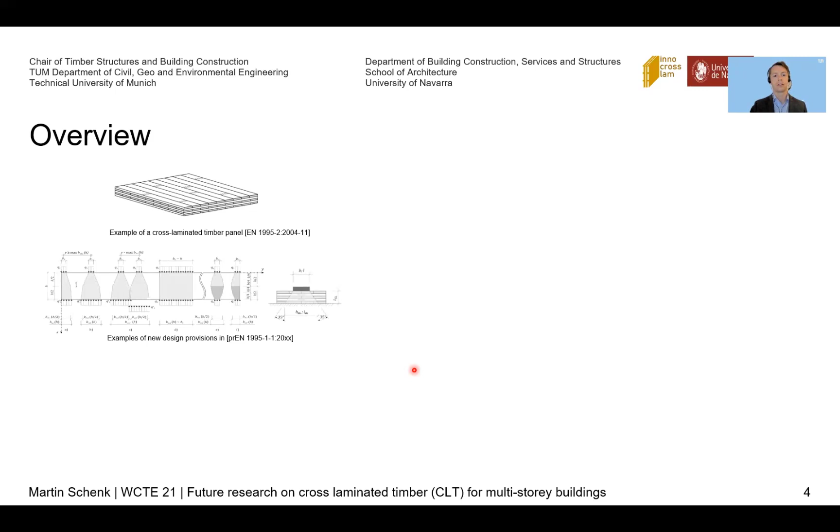The background of the study is very clear. The rather young material cross-laminated timber hardly made its way into the European design standards of the first generation, the Eurocodes. Those documents developed in the early beginning of the century got now revised towards the second generation, and CLT will be profoundly integrated. But the question remains, will this cover the majority of the design situations that we find every day on site?

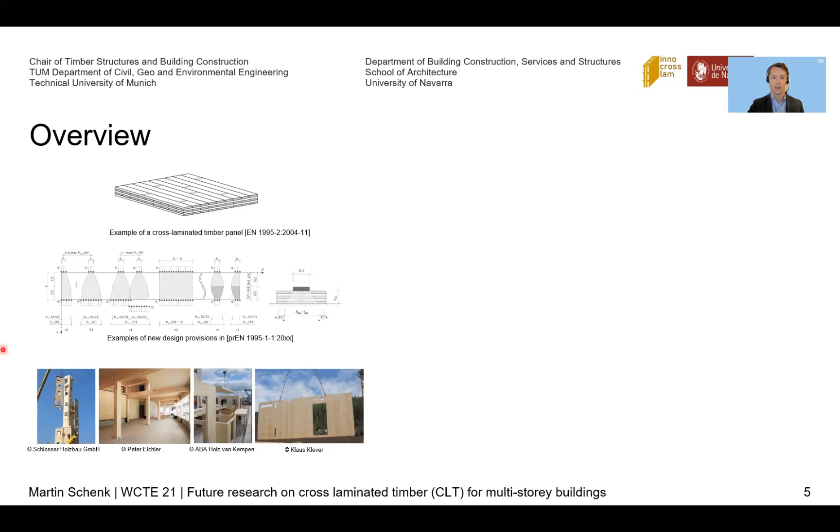To investigate this, we distributed a digital questionnaire on cross-laminated timber design worldwide to those practitioners which might process or install CLT. This means structural engineers, suppliers and manufacturers, and research institutions. We asked altogether 48 questions on the experience of our participants on CLT constructions, their general design methods, finite element software, and complex design situations.

Where do our participants see challenges, problems, and possible improvements? Beyond that, we ask more detailed questions on joints and connections and seismic design.

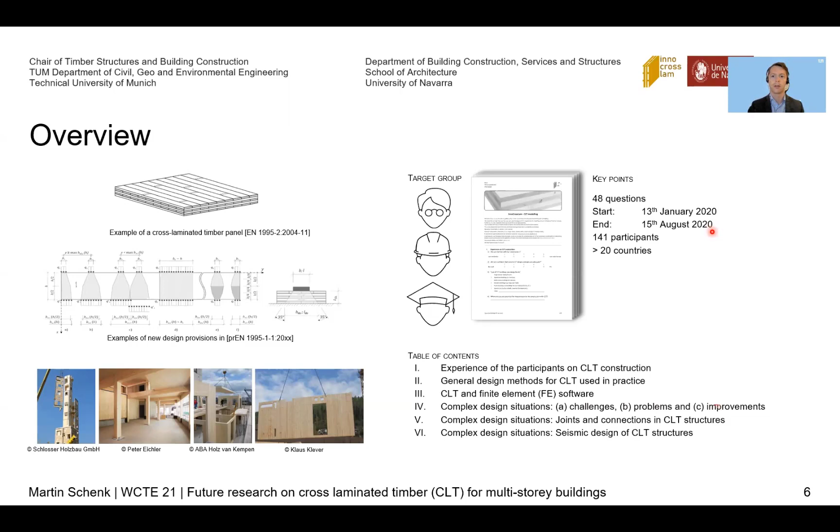We started the study in January 2020, and on the cutoff date in August 2020, we received feedback from 141 participants from over 20 countries. Most of the feedback came from countries like Spain, Germany, and Austria, but we also received some replies from experts from countries like Canada, New Zealand, and Australia.

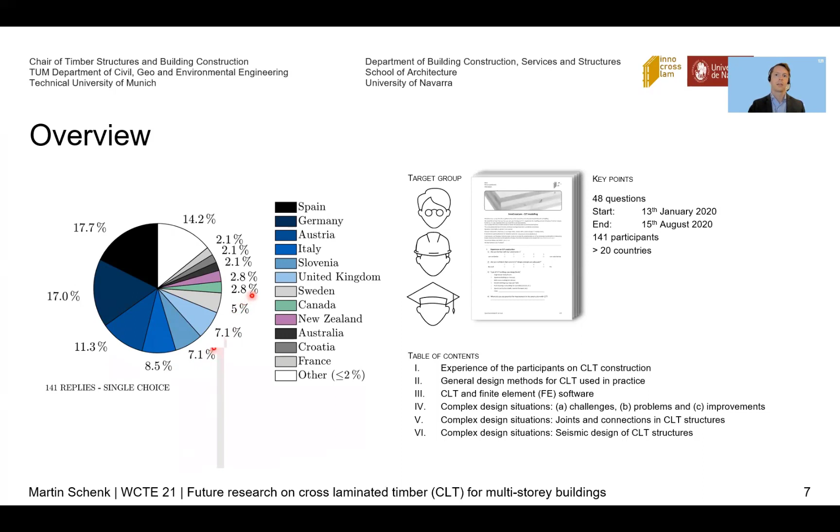Now let's deep dive into the experience of our participants on CLT constructions. The group of respondents consisted mainly of structural engineers and design companies with more than 10 years working experience.

Most of the companies have more than 30 employees, and they work mainly in the timber sector. To wrap this short numbers quickly up, the present data suggest an in-deep experience of our respondents and a suitable working environment for our study.

The majority of our respondents seems to be in, let's say, close contact with CLT. Nevertheless, even though the participating companies are working in the timber sector or are very active in the timber sector, CLT takes only a small percentage in the overall order volume of those companies.

This suggests or this indicates a huge market potential for CLT, not only in comparison to other materials, but also within the timber sector. Single double family houses, apartment buildings, and multi-story buildings higher than 4 stories are that type of constructions where CLT seems to be used most.

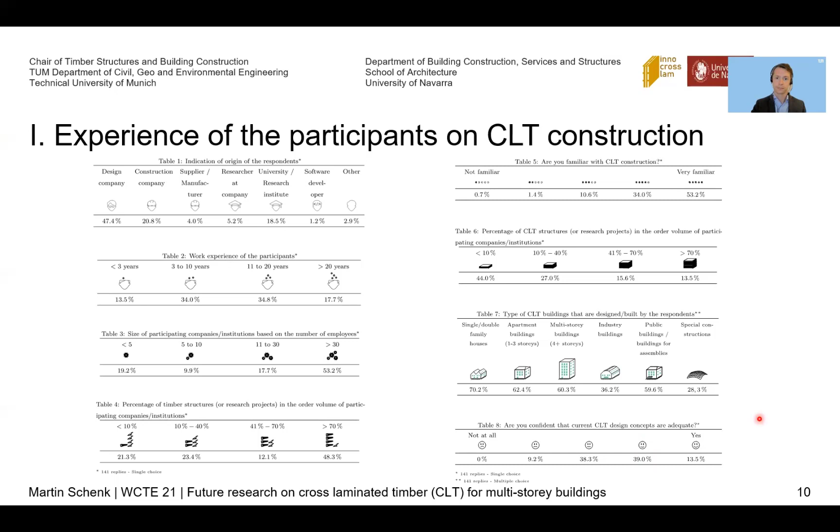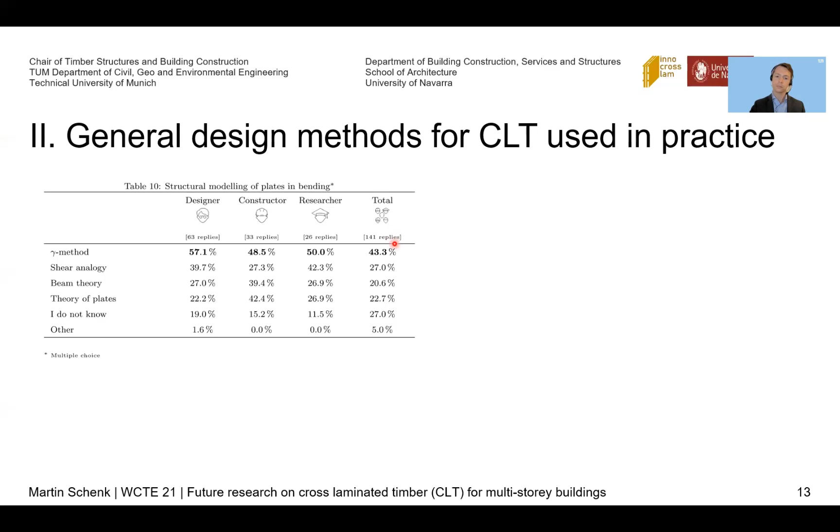With 15 to 20% rather high seems the share of respondents who do not know how the layering is considered. This impression is supported by the lower number of participants who apply homogeneous cross-sections into their modeling in comparison to those who process with the gamma method. Both values should be at least equal.

When asking about the implementation of torsional stiffness into the models, only one third of respondents indicated an absolute number. And finally, asking about the applied Poisson's ratio, 45% of participants responded that they do not know which value is used.

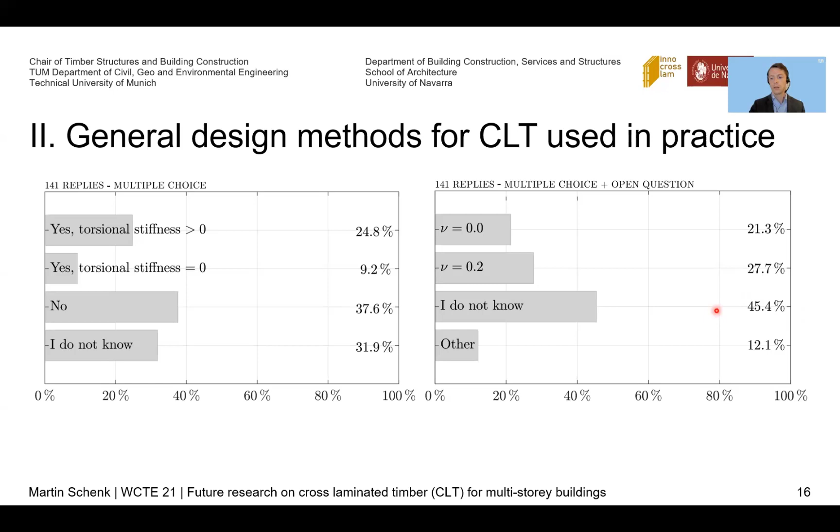The investigation showed as well that the satisfaction with those tools is rather high. And of course, the highest satisfaction is with those solutions that the engineers developed themselves.

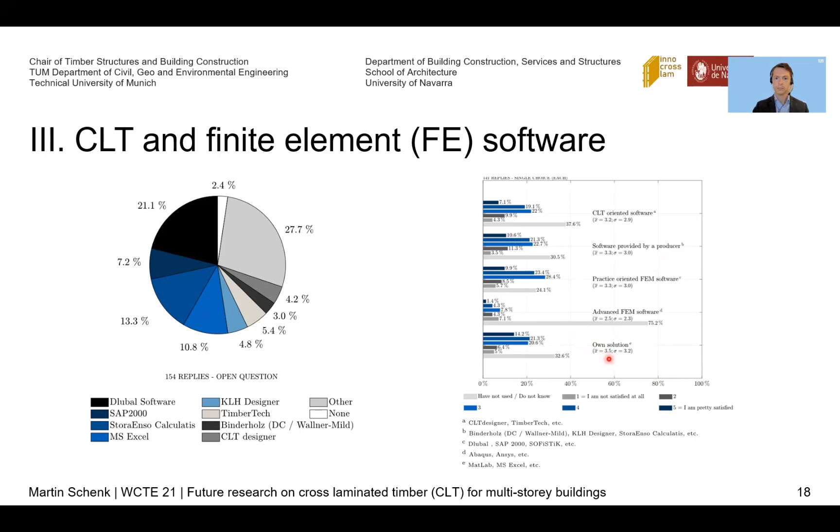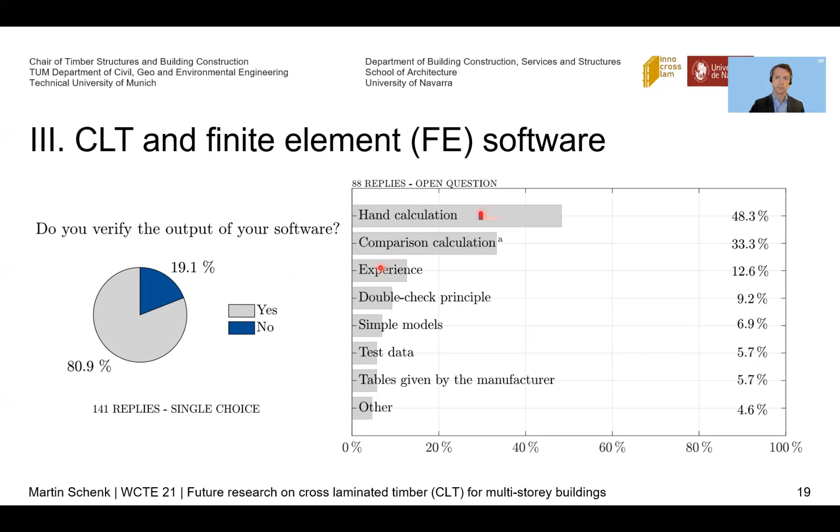We also asked if results given by software are verified. Almost 20% of our engineers do not verify software output, which seems to me personally frightening. When verifications are done, then mostly by hand calculations, comparison calculations in different software, or by experience. But of course, sometimes comparison is not so easy.

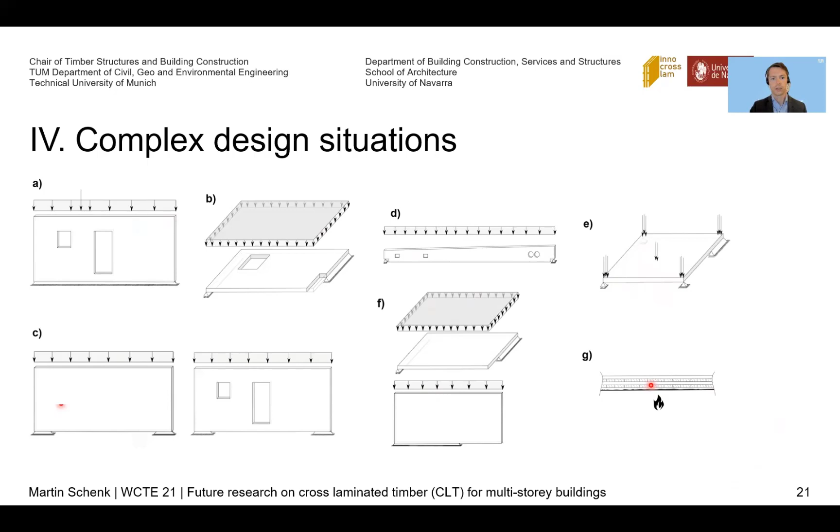Within these examples, the participants indicated concentrated loads and openings in walls and floors as the most challenging. Further on, it was clearly stated as explanation that design concepts and guidelines for those constellations are missing or incomplete.

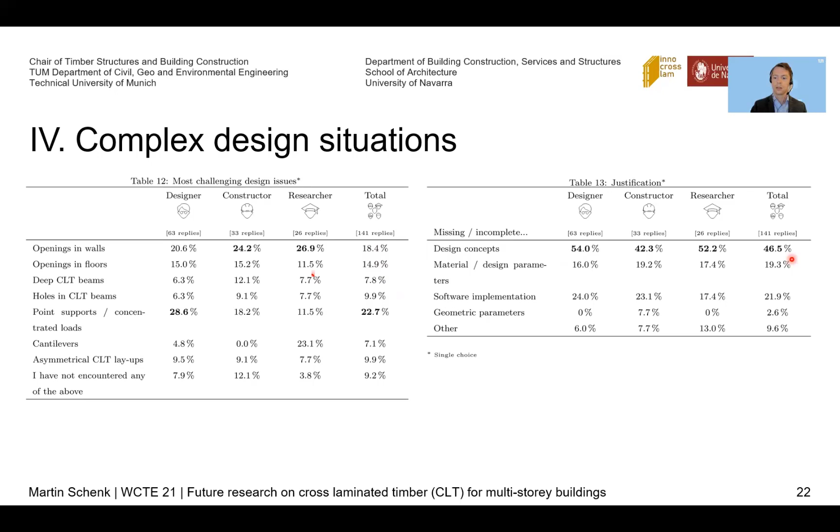We also asked participants to provide other challenging design situations. As you can see, joints, connections, vibrations, and fire design have been answered relatively often. Other mentioned categories were durability or execution rules. And again, the justification for naming them was missing or incomplete design guidelines.

Since we identified joints and connections prior to the distribution as a potential issue, we asked some more detailed questions. One was about the modeling of those connections. Independent of where a connection is applied within a structure—whether within a floor, within a wall, or between a floor and a wall—engineers active in practice are mostly used to modeling them as springs. But when it comes to the absolute numbers of those stiffnesses, a bandwidth cannot be given.

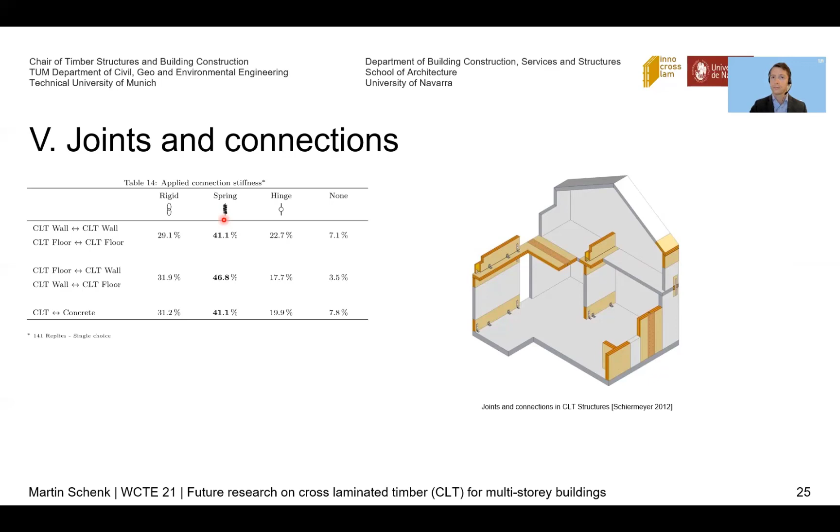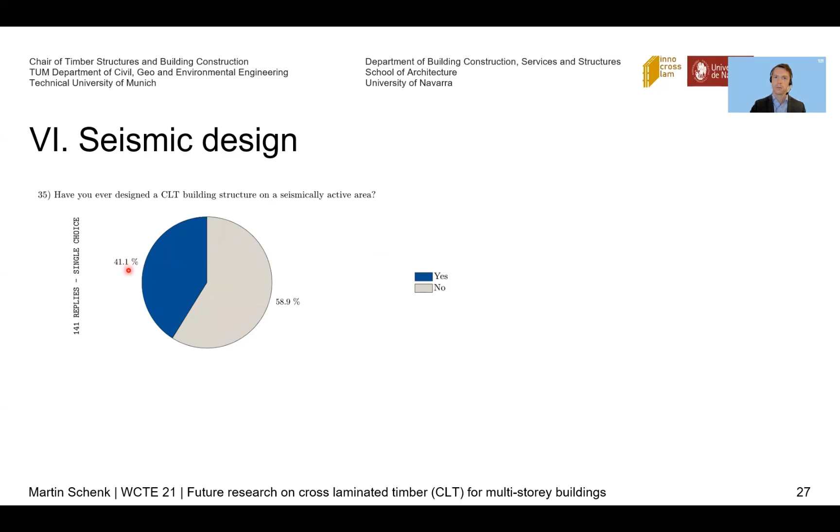Now let's finalize our evaluation with the design of multi-story CLT structures in seismically active areas. Approximately 40% of our participants carried out such design scenarios. They clearly prefer static methods, like the lateral force method and the modal response analysis, before carrying out dynamic analysis.

Also, linear material models seem to be more likely used than nonlinear ones. When asking about reasons why CLT structures are not so common in seismically active regions, again missing standardized solutions are highlighted by the practitioners. Also, a need for education and training is deemed to have a major influence.

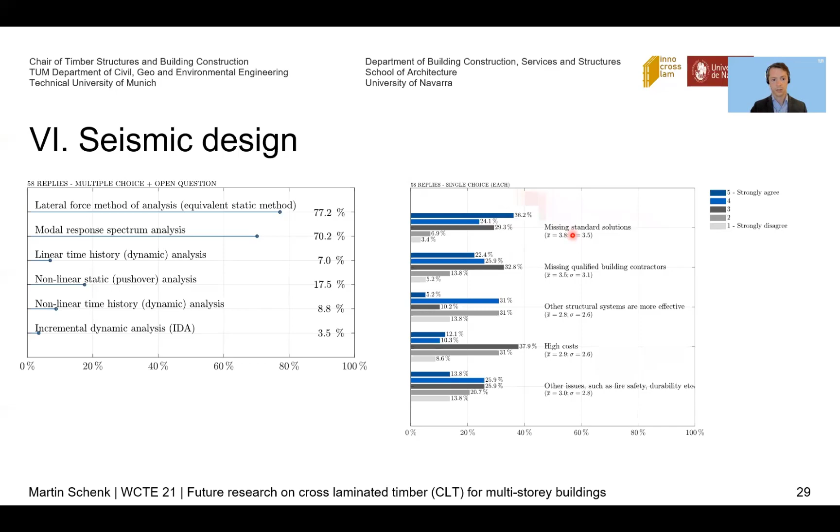So now, after approximately 10 minutes full of numbers and diagrams, let's draw our conclusions. Knowledge gaps exist with respect to some material parameters, for instance the torsional stiffness of plates in bending, and the Poisson's ratio.

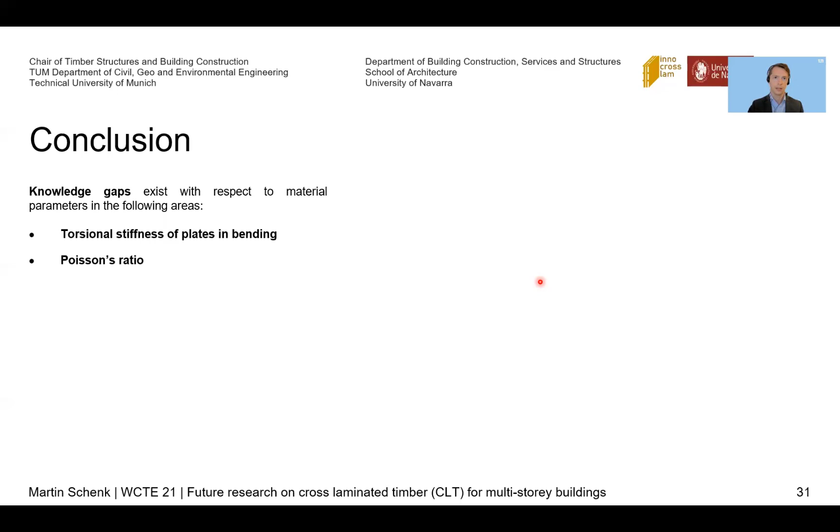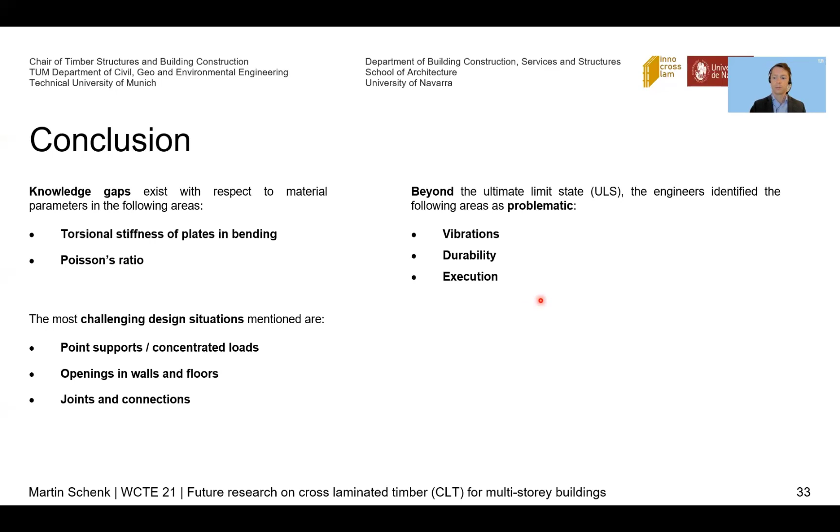The most challenging design situations for engineers active in practice are point supports and concentrated loads, openings in walls and floors, and joints and connections. Beyond the ULS, the areas of vibrational behavior, durability, and execution were identified as problematic. Reasons for these challenges and difficulties are mostly missing or incomplete design guidelines and a lack of education and training.

So further research in these fields would actually increase the applicability and the competitiveness of CLT with other building materials globally. So let's take that as our task.